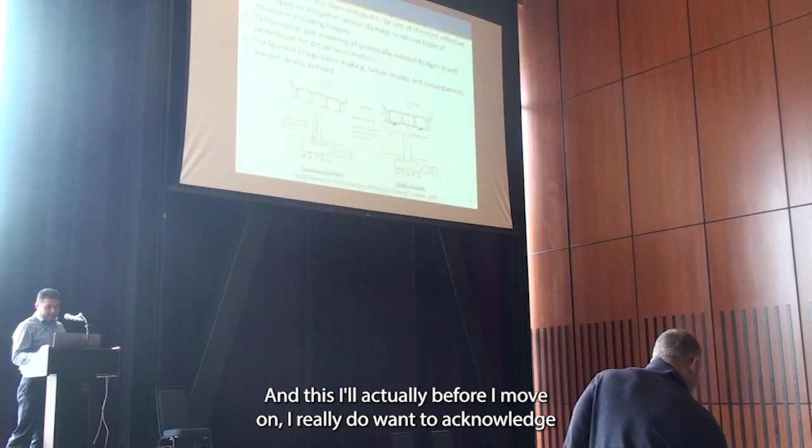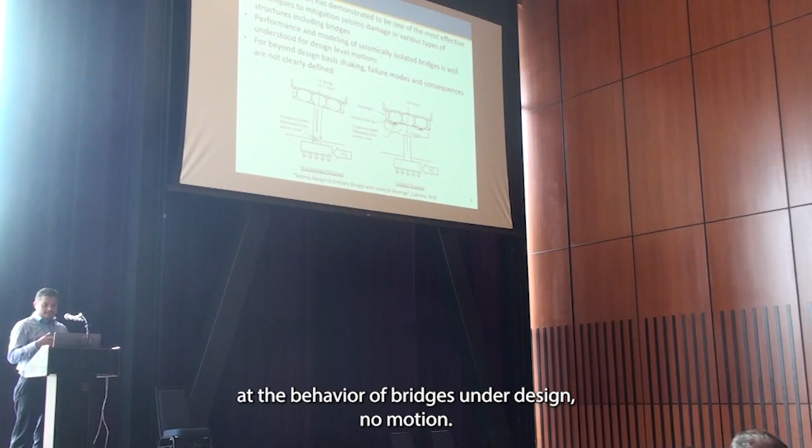We've been looking at the behavior of bridges under design level motion, and we know seismic isolation to be one of the most effective ways to protect structures from any type of damage. That has been well understood, but what about when we exceed the design capacity of the system?

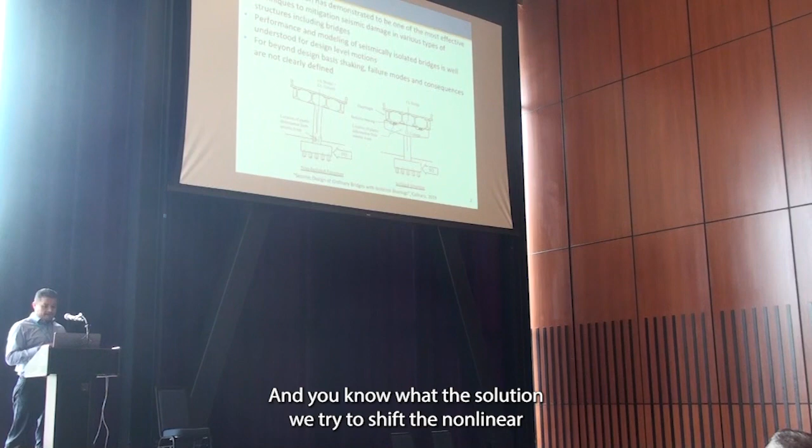How does damage progress? With isolation, we try to shift the nonlinear behavior to the isolators instead of plastic hinging in the columns. But at some point, as you keep loading the structure, what's going to happen to the structure?

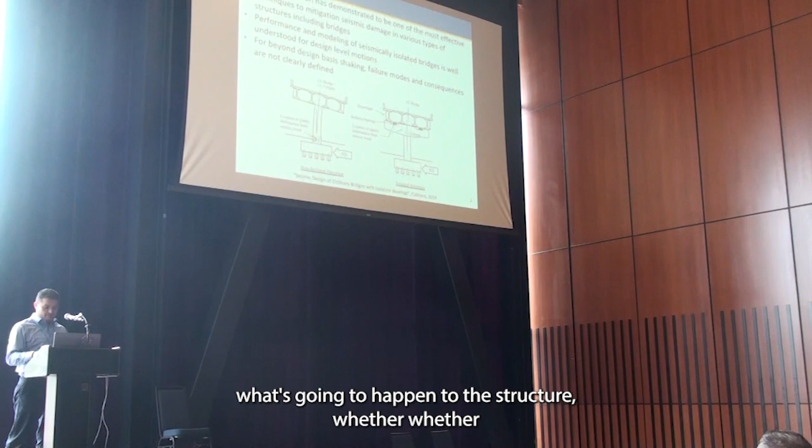As the limited studies looking at this have shown, you can look at failure of the bearings, as some testing has shown at Reno. Or there's been actually one test where they saw some yielding in the columns.

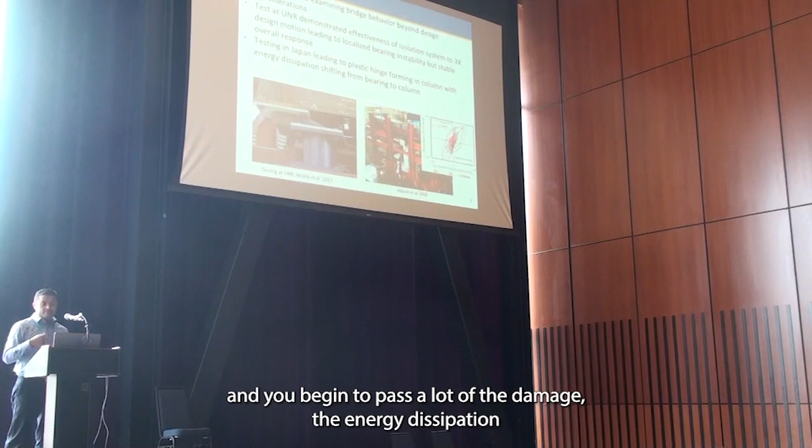That showed, as you expect based on seismic isolation theory, as you begin to yield your substructure, your periods change, the dynamics change, and you begin to pass a lot of the energy dissipation to the structural members instead of the isolators.

So we were interested in how this changes, and in terms of loading beyond design, whether there's anything we could do or considerations we should look at to improve the performance of bridges for beyond design considerations.

In this project, we're looking at developing the models, like looking at what are the limit states of bridges, and making sure we capture those types of behavior, including the bearings themselves.

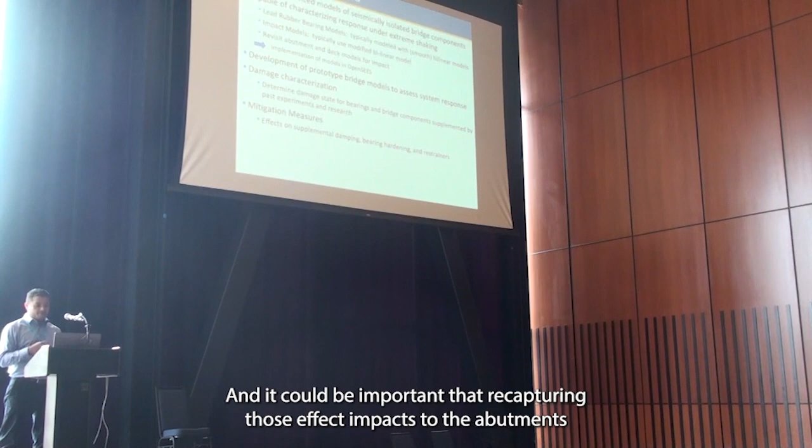We're looking at lead rubber bearings. Later on, we could look at friction pendulum bearings, but when you go beyond design and reach very high strain limits in the rubber, you have hardening and other behaviors that could be important, so we're capturing those effects, impact to the abutments, or shear keys, whatever may be in the way.

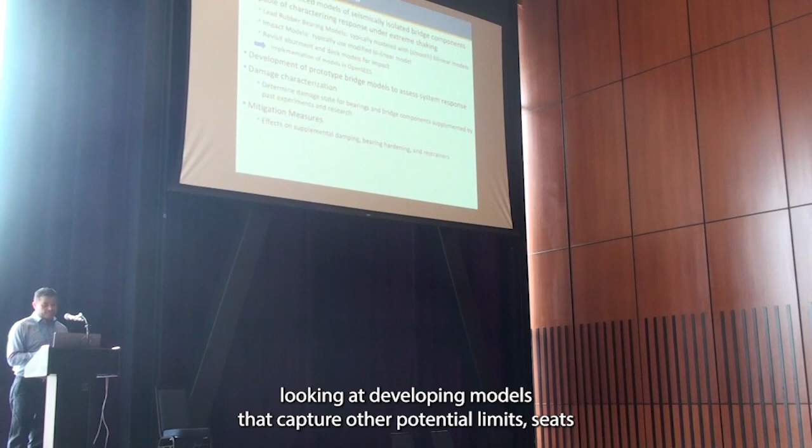So looking at developing models that capture the potential limit states in the bridge, and trying to develop prototype models of these in OpenSees, to then be able to characterize the type of damage that we could expect.

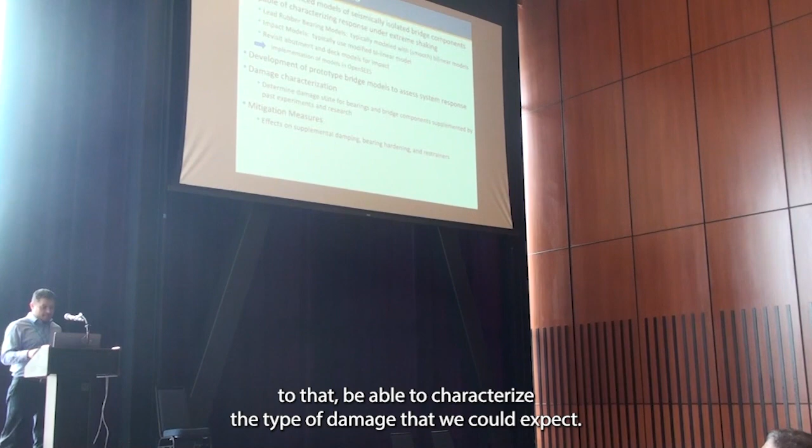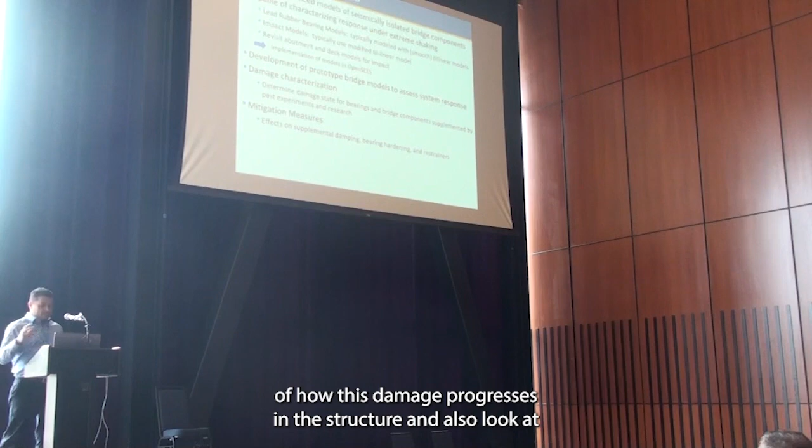So this is kind of the objective for now, really developing the models for this and trying to get an understanding of how this damage progresses in the structure, and also looking at how we can improve the design, whether by changing the isolator configuration, adding supplemental damping, or restrainers, and the effect those have on the performance of the bridge.

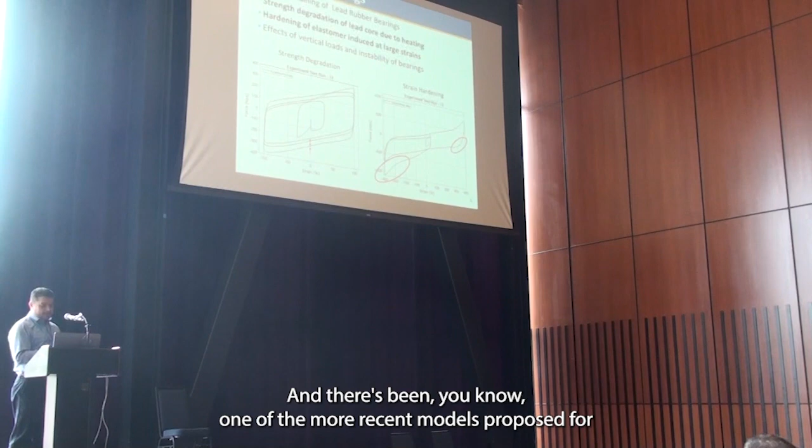So we've been working a lot within my research group on modeling of rubber bearings. One of the more recent models proposed for lead rubber bearings is Lead Rubber X, available in OpenSees, that captures degradation of strength with heating.

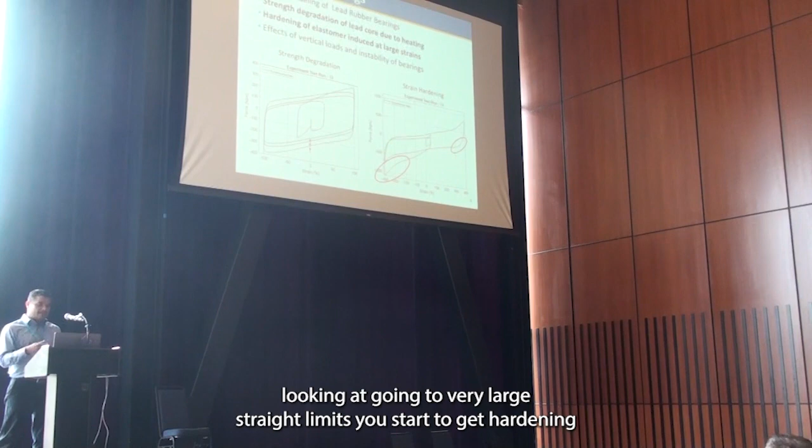But as we've done testing at even large scale bearings at SRMD, looking at going to very large strain limits, you start to get hardening. That's probably more reminiscent of high damping rubber bearings.

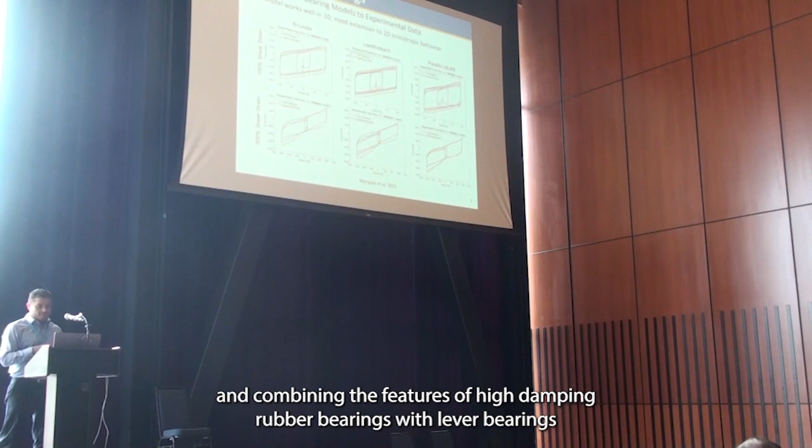So we've been looking at developing models combining the features of high damping rubber bearings with lead rubber bearings to be able to capture the behavior throughout a larger range of loading, leading to large strains, capturing those potential rubber hardening effects and so forth.

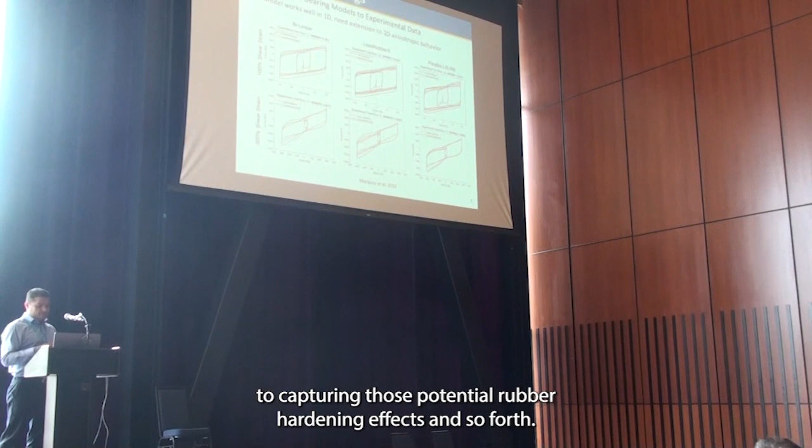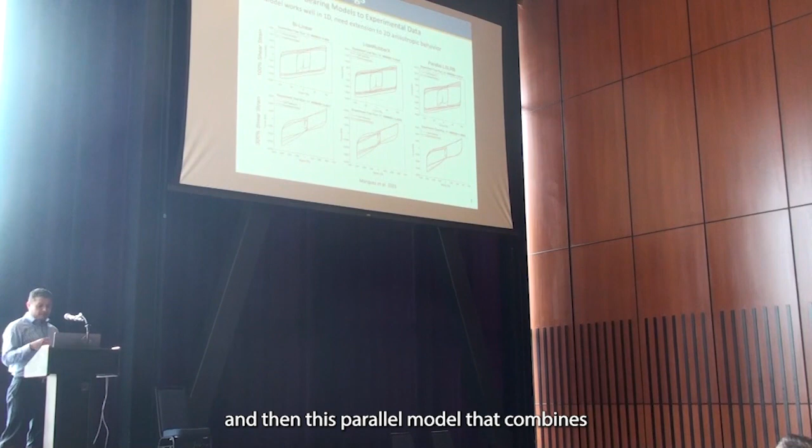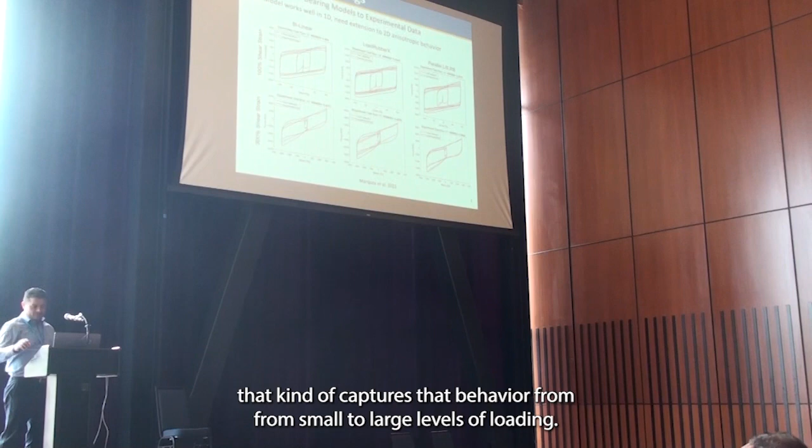So this is just a comparison of bilinear models, which are typically used in most analysis, one of the more recent models, Lead Rubber X, that shows the strength degradation, and then this parallel model that combines some of the features of high damping rubber to capture strain hardening and some of the more complicated behavior of rubber, to have a model that captures the behavior from small to large levels of loading.

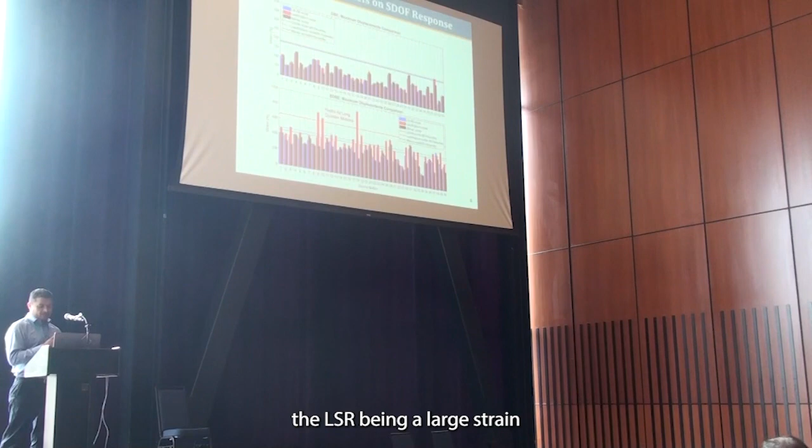So just to show you, these are simulations of a single degree of freedom system with these different models, the LSLRB, or large strain lead rubber bearing, Lead Rubber X, and bilinear, kind of showing a comparison.

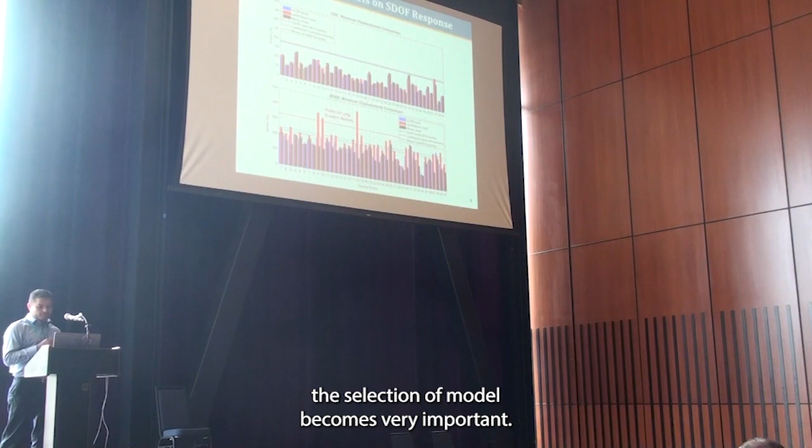If you look at a design level loading on the top, the model selection really doesn't matter, but as you go to very large levels of strain, the selection of the model becomes very important. One of the features, the red lines stick out on the bottom, that's the Lead Rubber X model with the heating.

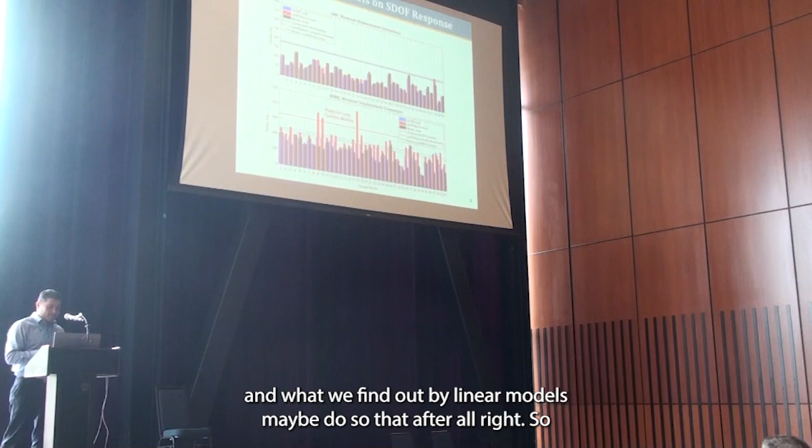But when you consider strain hardening effects, even in large strains, that kind of compensates. And well, we find out the bilinear model doesn't maybe do so bad after all, right?

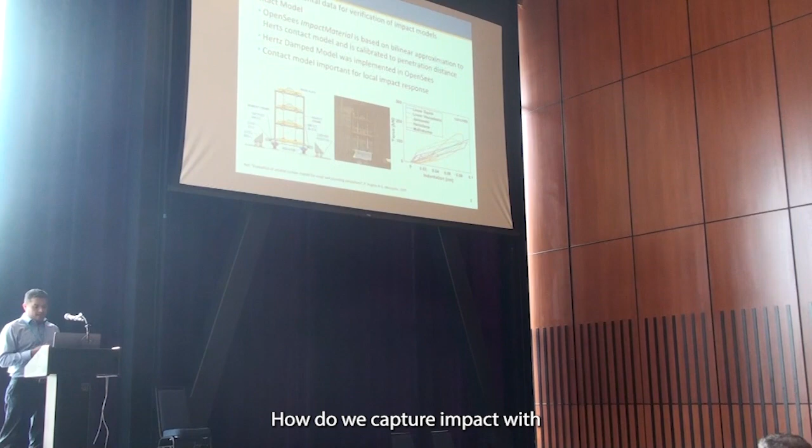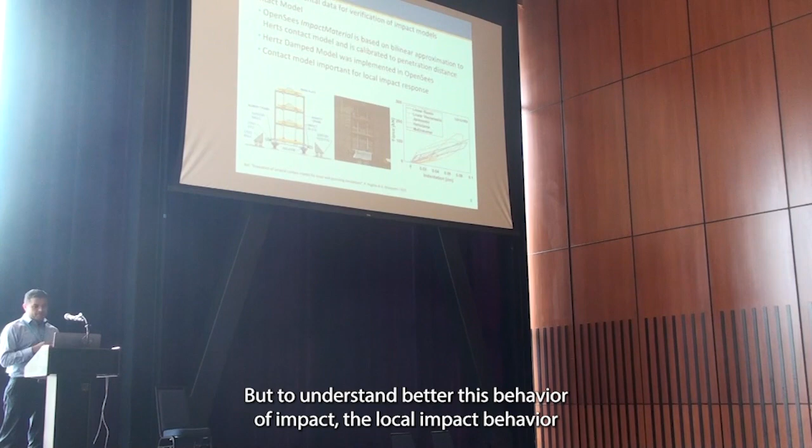So the other area we've been looking at modeling is impact. How do we capture impact with the abutments? There's been a lot of bridge work. In my research group, we started looking more at this for buildings in the past several years, trying to improve some of the models like the Kumar model shown. There's a bilinear model that was developed for bridges, but we're trying to understand better this local impact behavior and improve the models.

So we've implemented a Hertz-type model now in OpenSees to be able to better capture that behavior. This is based on some experimental data.

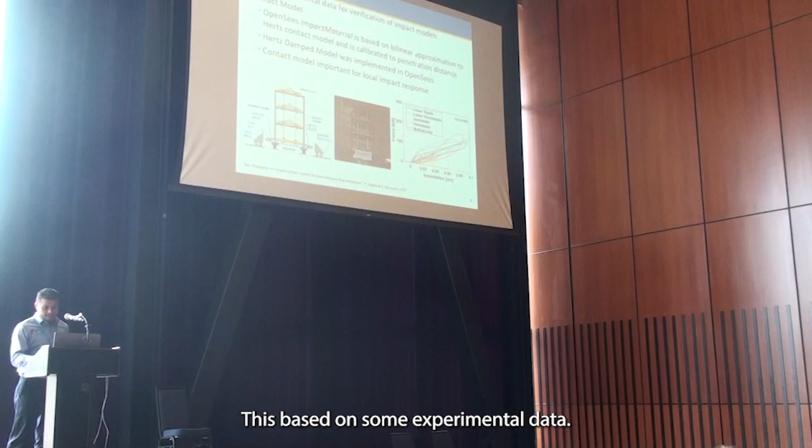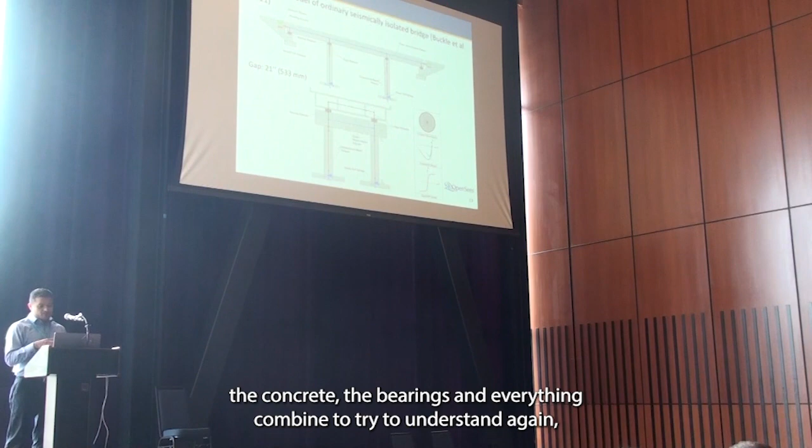Considering the more complicated bearing models capturing impact effects, we've been looking at developing, for ordinary bridges, a simple bridge model looking at the nonlinear behavior of the concrete, the bearings, and everything combined, to try to understand how these bridges behave for design and even beyond design.

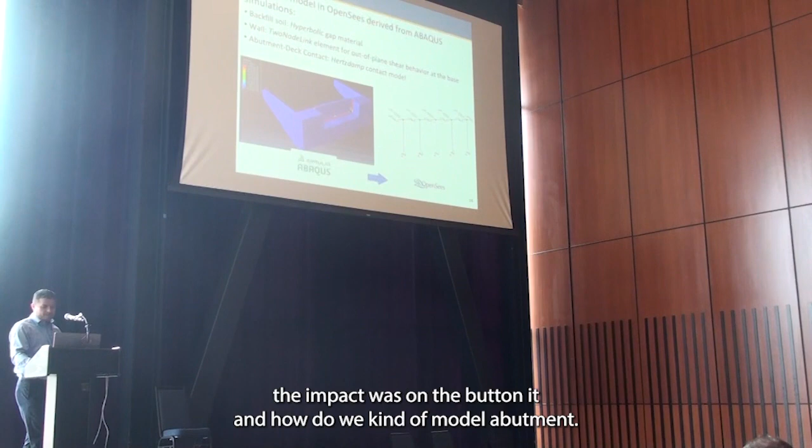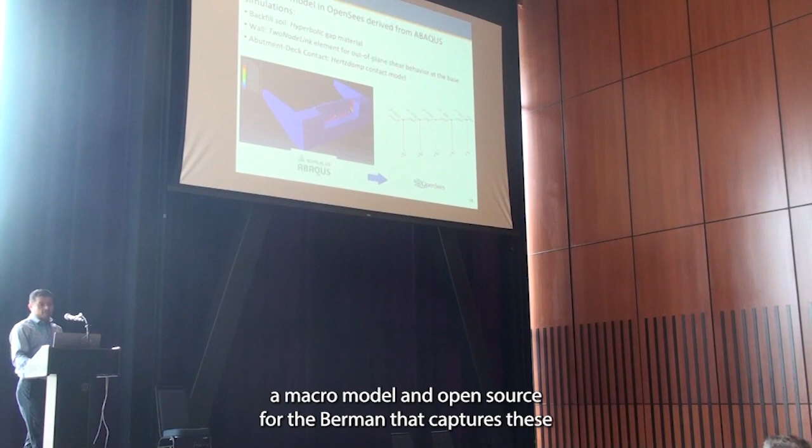One area we had to focus special attention on, going back to the impact, was the abutment and how we model it. We didn't find a whole lot of references on that. So we looked at developing models in Abaqus to try to calibrate a macro model in OpenSees for the abutment that captures these key characteristics of impact.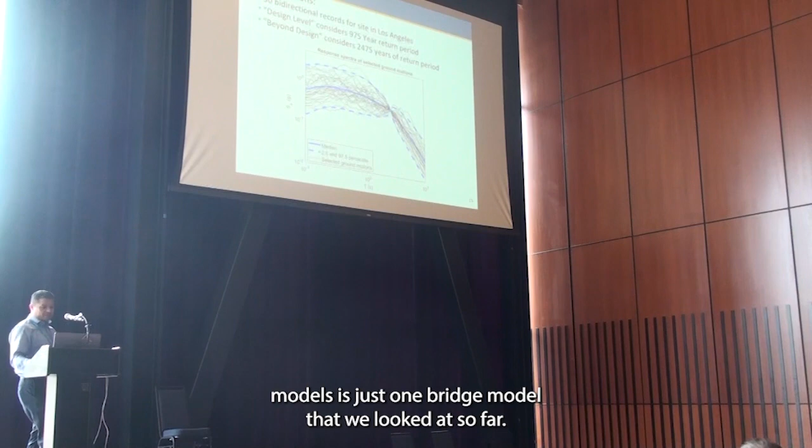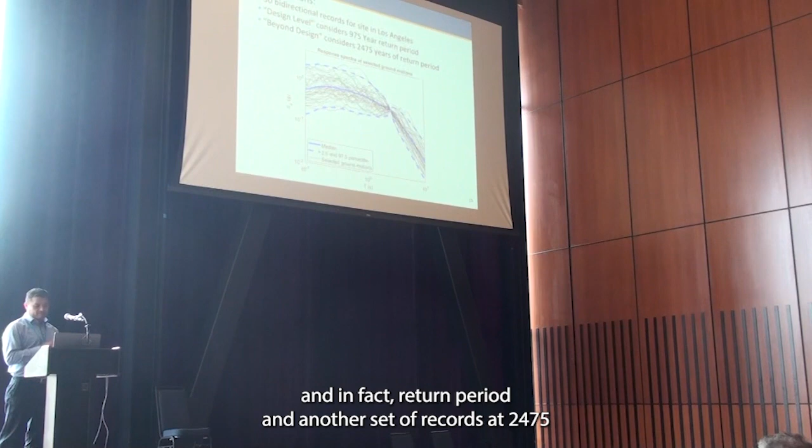So in developing the bridge model, this is just one bridge model we looked at so far. We developed a set of ground motions, just 30 motions: one set for the design level, what we consider the 975-year return period, and another set of records at 2475 years referred to as beyond-design motions.

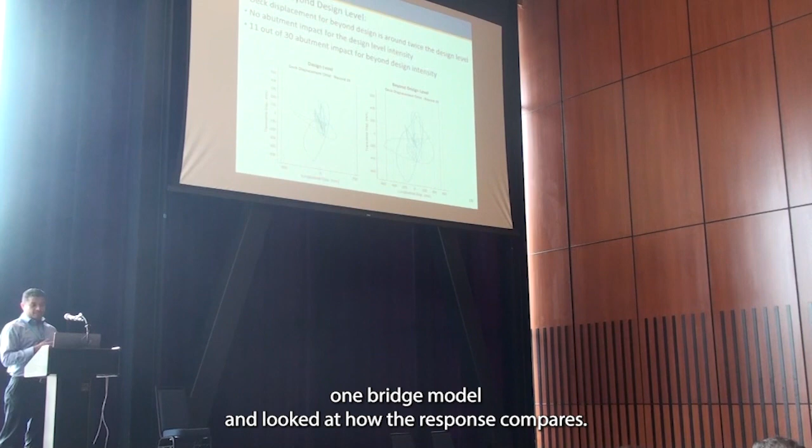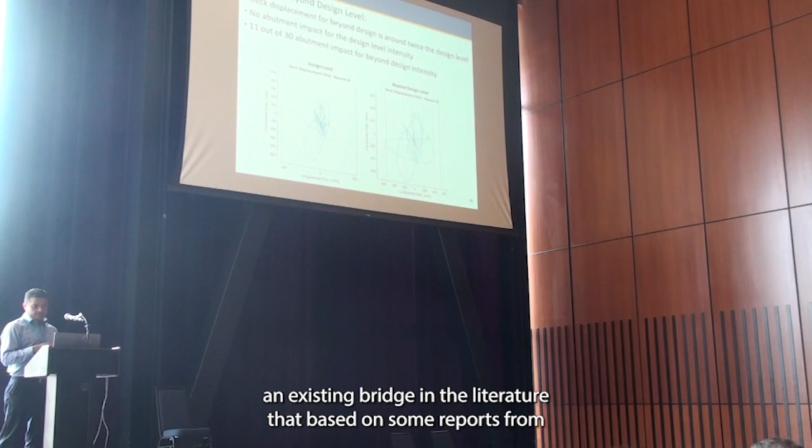For these sets of motions, we looked at just that one bridge model and how the response compares. We took an existing bridge from the literature, based on some reports from Professor Buckle at Reno, that was isolated. I think the isolation was modeled by Constantinou at Buffalo. So we took this existing bridge to look at how current bridges designed to current standards would perform.

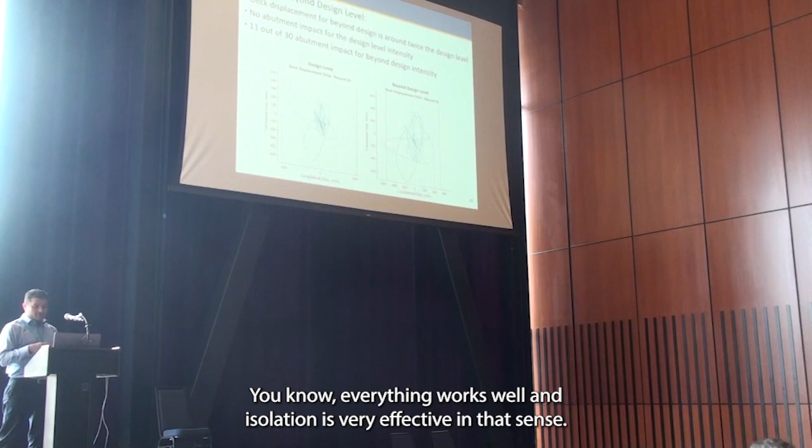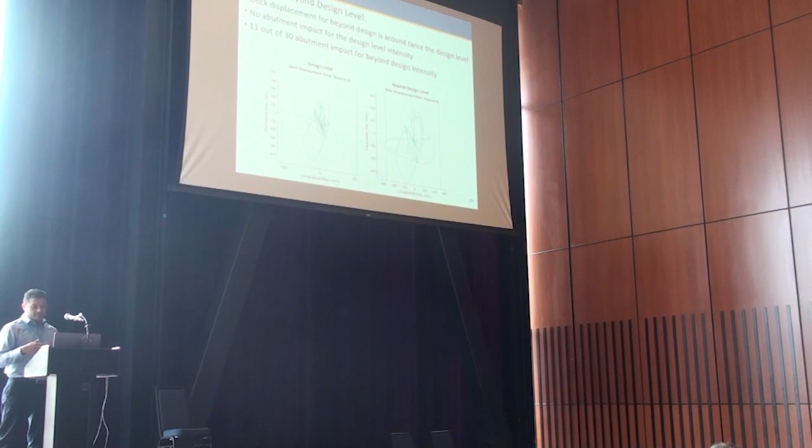For design level loading, again, is what we would expect: everything works well, the isolation is very effective in that sense. But when you look at beyond-design motions, you do start seeing the displacement exceeding the capacity, or the specified design gaps for the abutments.

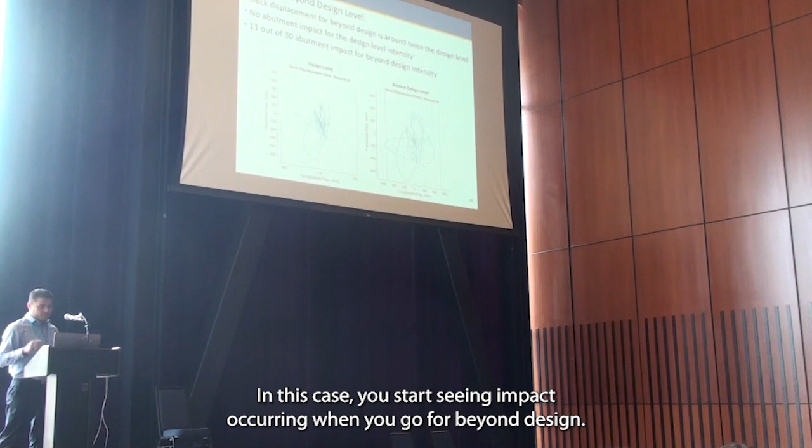The dashed lines are the location of the abutments. In this case, you start seeing impact occurring when you go beyond design. For that set of motions, about 11 of the 30 motions had some impact occurring.

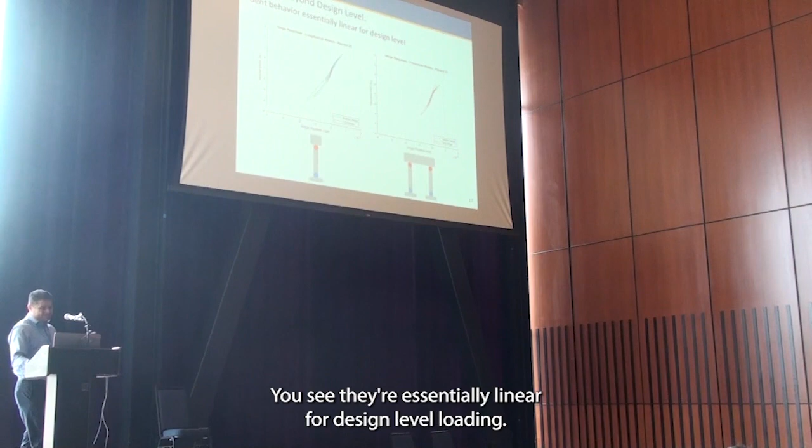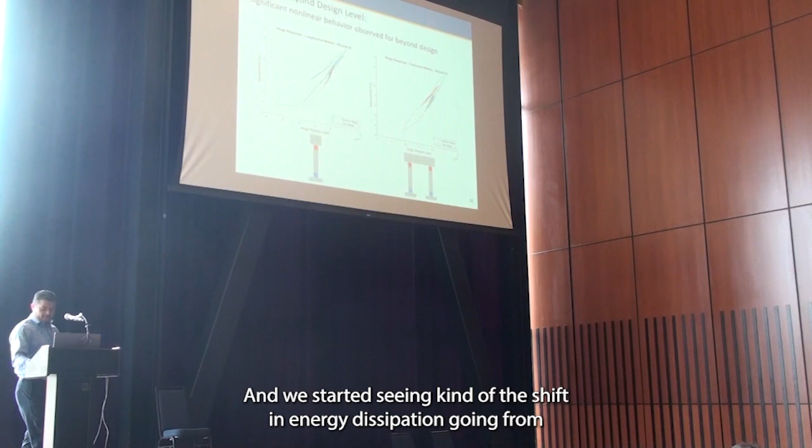In terms of the response of the bents themselves, they're essentially linear for design-level loading. But when we went to beyond-design loading, for one of the motions we selected with roughly an average response, you start seeing the development of plastic hinges within the bents, and a shift in energy dissipation going from the isolators to the hinges.

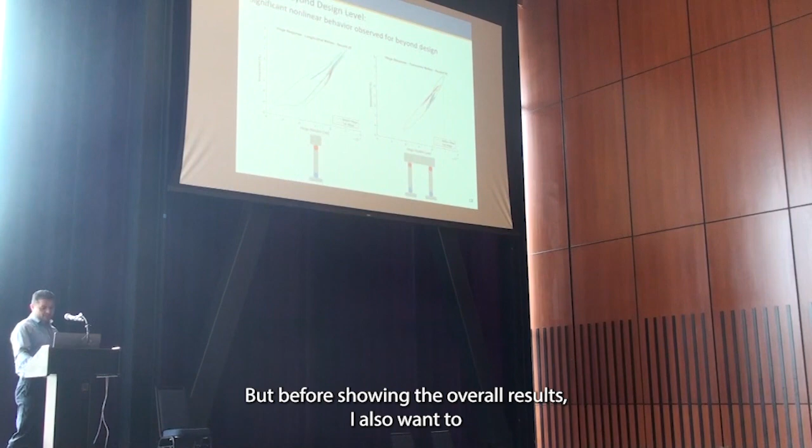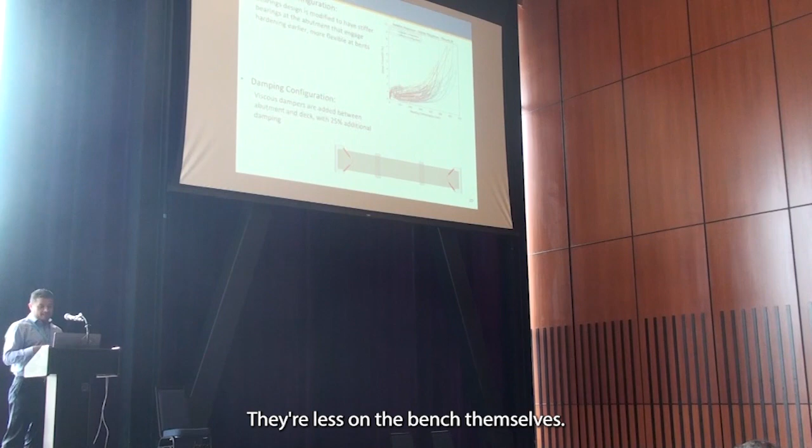I'll talk a bit more about that after. But before showing the overall results, I also want to talk about some other slight modifications we made to the bridge: shifting the configuration of the isolators, putting stiffer isolators at the abutments to attract larger forces there and less on the bents themselves, and also adding viscous dampers.

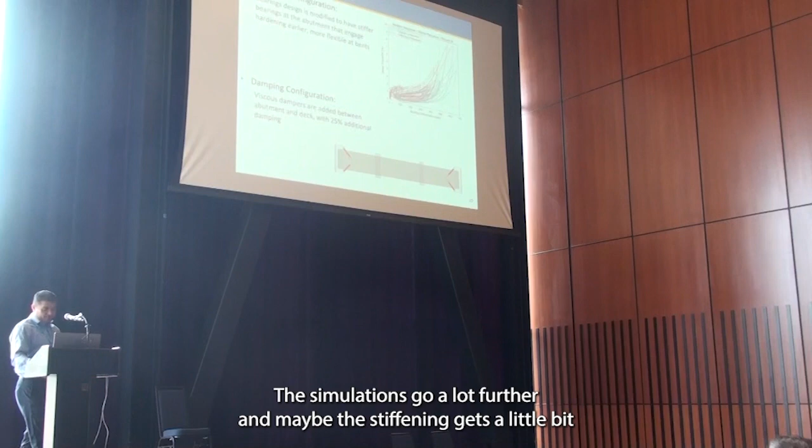What happened when we added the stiffer bearings at the abutments is we attracted larger forces, with stiffening. The lead rubber bearing model we're using has stiffening behavior that was calibrated up to a certain level, but the simulations go a lot further, so the stiffening may get a bit exaggerated at that level. That's something we have to work out in the model later.

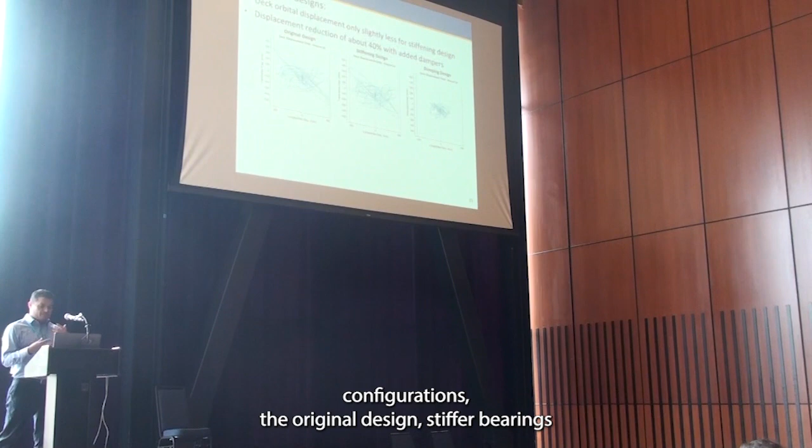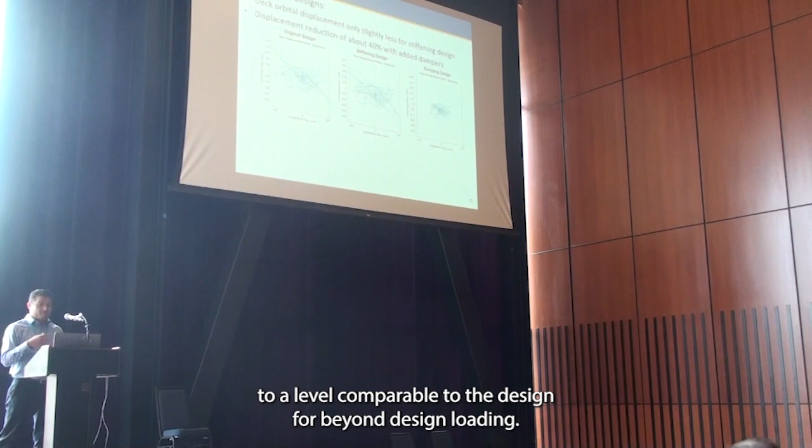Despite that, when we look at the different configurations—the original design, stiffer bearings at the abutments, and added damping—we found damping is really effective at reducing the displacements, getting them down to a level comparable to the design case even for beyond-design loading. The stiffening gives similar displacements but with a minor reduction overall, leading to fewer impacts across the set of ground motions.

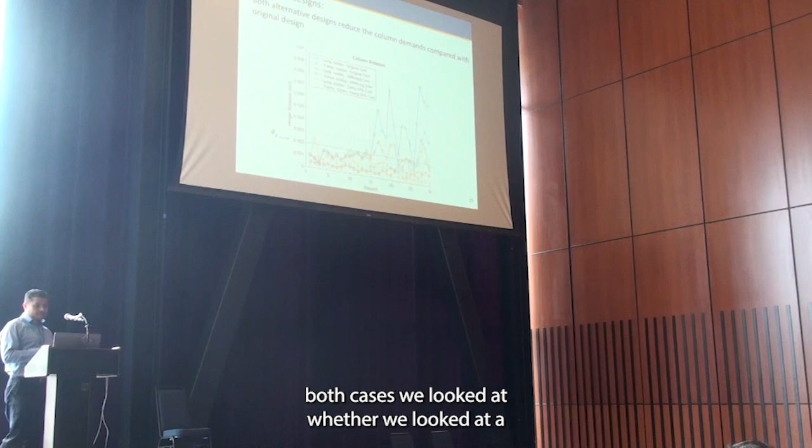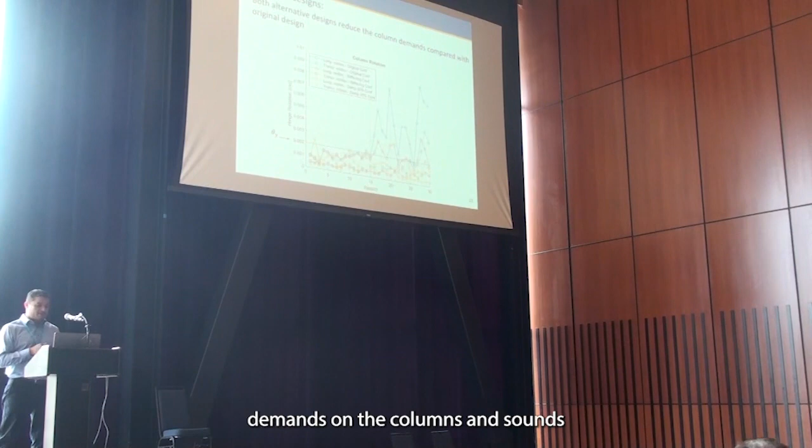But in both cases, where shifting the bearings around seemed to matter was in terms of the hinge rotation demands on the columns themselves. In blue, this is the longitudinal direction, and you get some very high levels of hinge rotation—still not critical to the point of near collapse, but significant hinging.

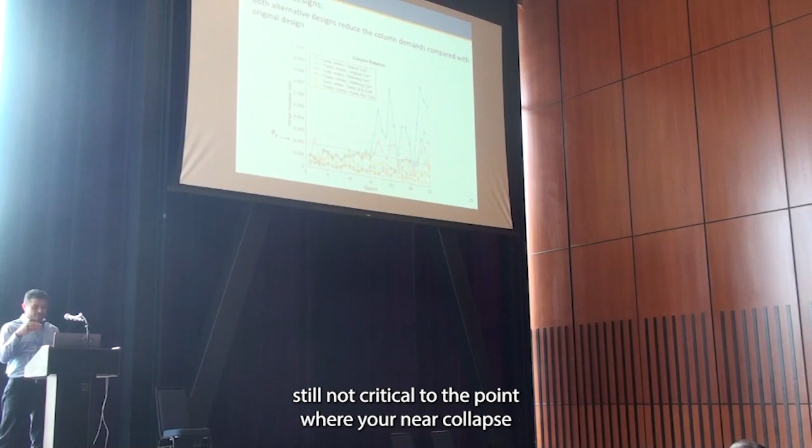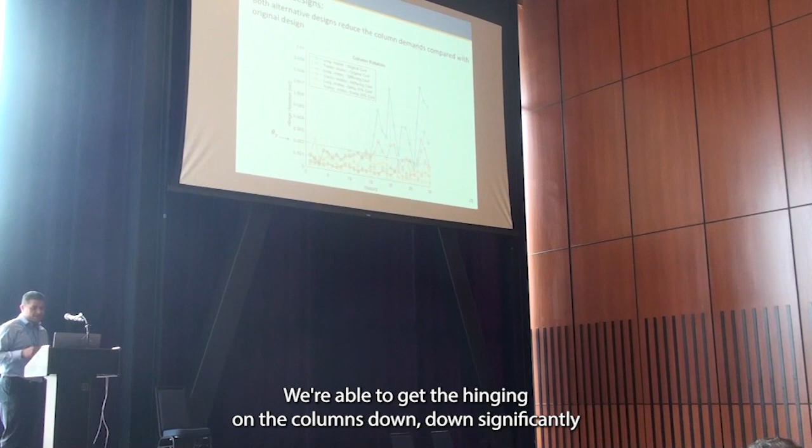By making these two modifications to the design, we're able to significantly reduce the hinging on the columns, both in the longitudinal and in the transverse direction.

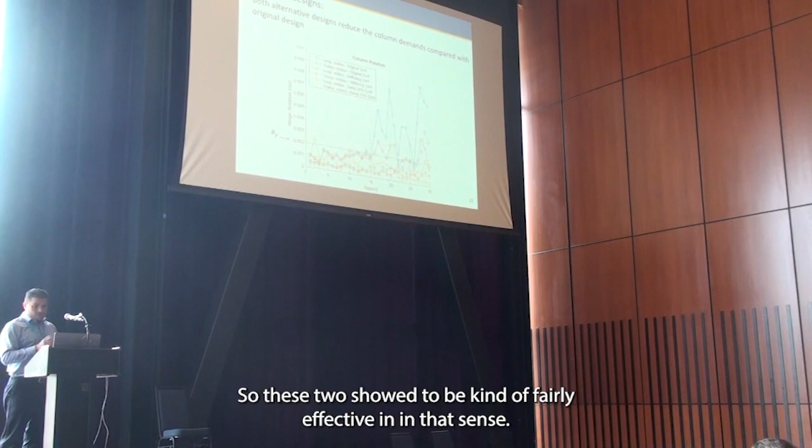So these two show to be fairly effective in that sense, and these are kind of the key results I wanted to focus on, to summarize our results. One of the things we're primarily interested in understanding here is, as you begin to develop hinges in your structure, how does that mechanism change in terms of transferring energy dissipation from the isolators to the concrete hinges themselves?

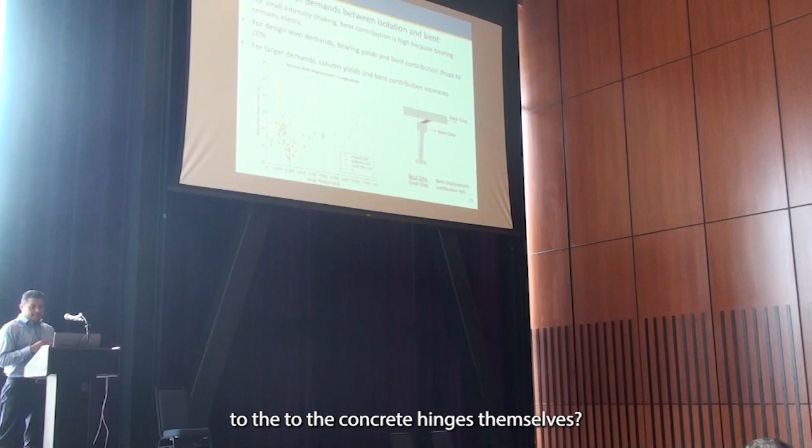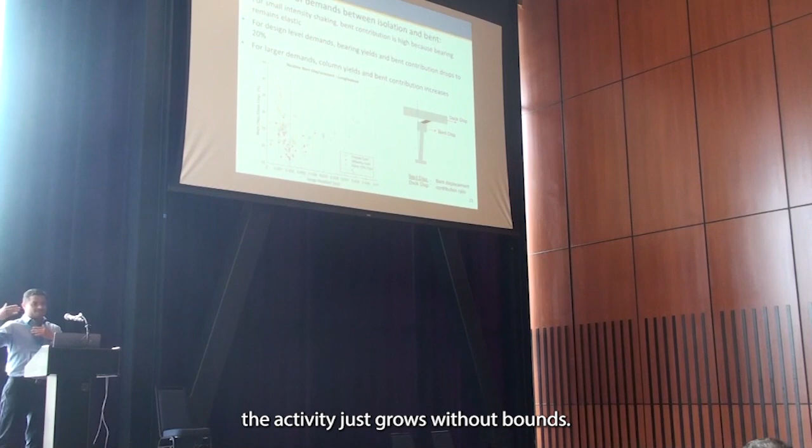This is very important because in buildings this has been looked at in a lot more detail. Once you begin to yield an isolated building, the ductility just grows without bounds - it's very hard to control ductility once you yield in an isolated building. Bridges are a different mechanism. The theory has always been that you're going to get the same type of behavior, and you are seeing this effect, but it doesn't seem to be as significant as it is for building structures that are isolated.

This plot shows the contribution, or the ratio of bent displacement to the total deck displacement, showing how much the bent is taking versus the contribution from the isolators themselves. For very low levels of shaking, the isolator could take time to engage, and most of the contribution doesn't really matter for small levels of shaking. You could have large contributions from the bent itself, and that's okay.

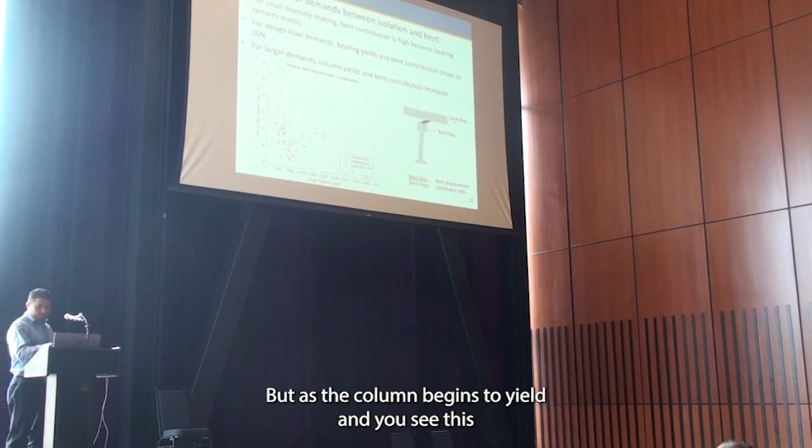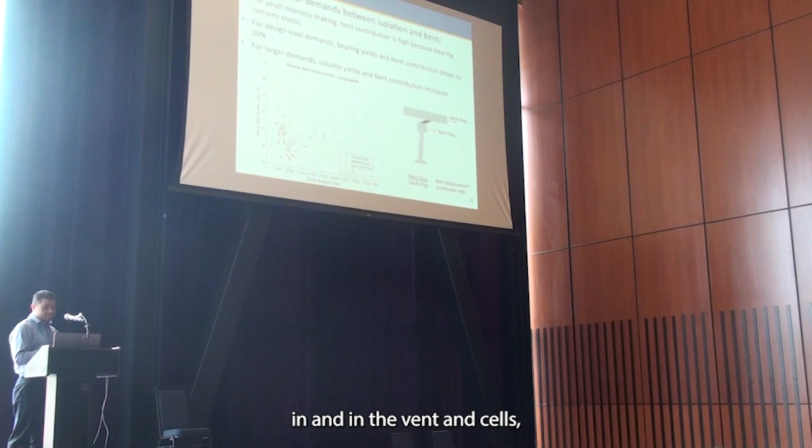But as you go to design level loading, you start seeing a lot higher demand, and more demand gets transferred to the isolator, as it should be. But as the column begins to yield - shown in the dotted line there - where your hinges begin to yield in the bent themselves, you start seeing an increase in this configuration, especially looking at the original configuration, an increase in the amount of bent displacement compared to the isolator.

So you start seeing the shifting in mechanism of the hinging. But again, it's still in a controlled manner, I would say, unlike buildings where we're seeing that this just kind of seems to take off.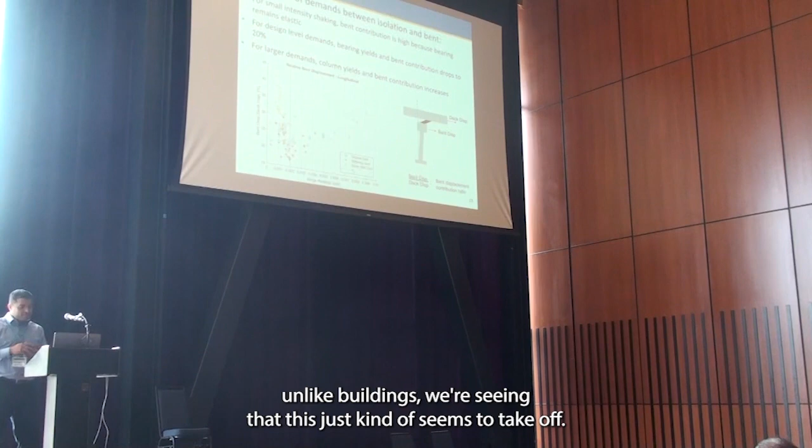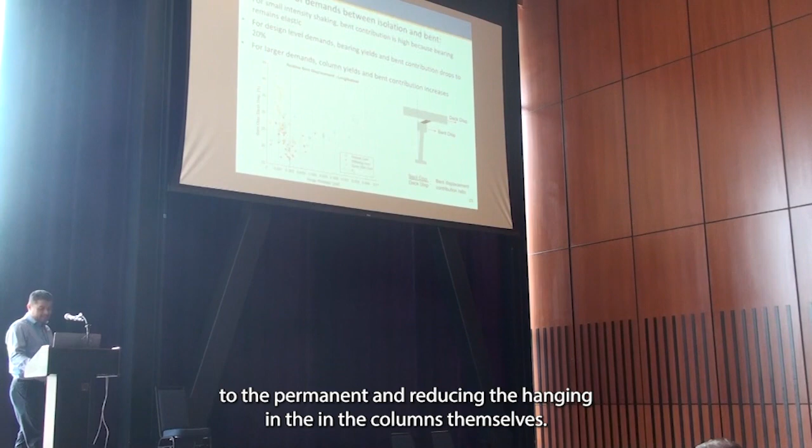But nonetheless, when you look at the cases with damping, you're getting a lot more contribution from the bent, but it really doesn't matter because the displacements are overall fairly small - you're not yielding. And then with adding stiffer isolators at the abutments, you're also transferring a lot of the load to the abutment and reducing the hinging in the columns themselves.

So for the overall conclusion from the study: at design level shaking, isolation performs as expected - this is no surprise, it's been looked at quite a bit in the past. But beyond design shaking, you're seeing the development of plastic hinges. Again, we just looked at one prototype bridge here and one set of ground motions, and there's certainly a lot more to do in that area.

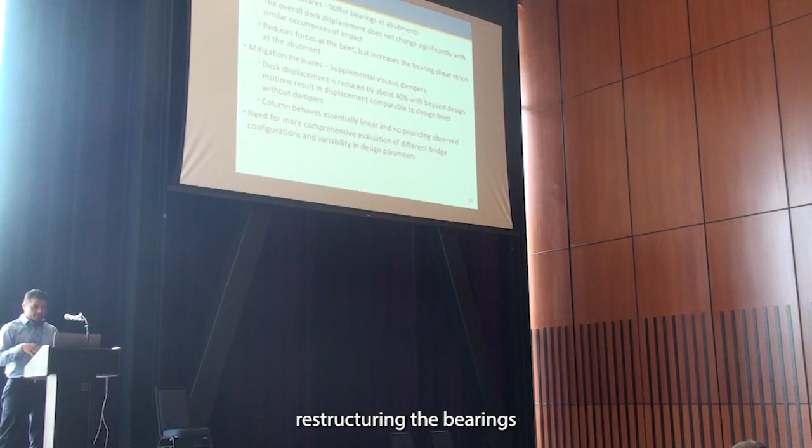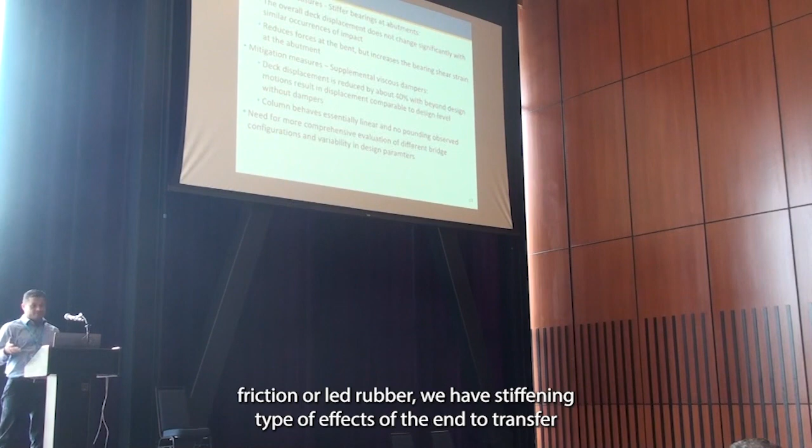This way of maybe restructuring the bearings and how we place them in the isolator, attracting more forces to the abutments, may be one way of protecting the bents a little further, and even having isolators where you could control whether it's friction or lead rubber, where you can have stiffening type effects in the end to transfer more of the forces towards the abutments and protect the bents in this case.

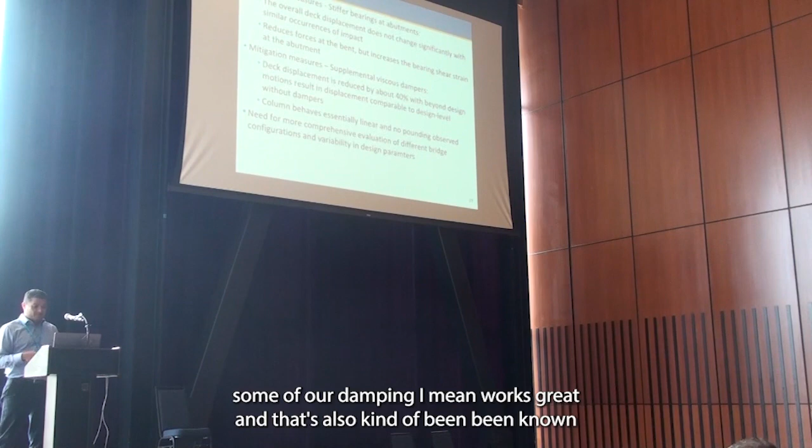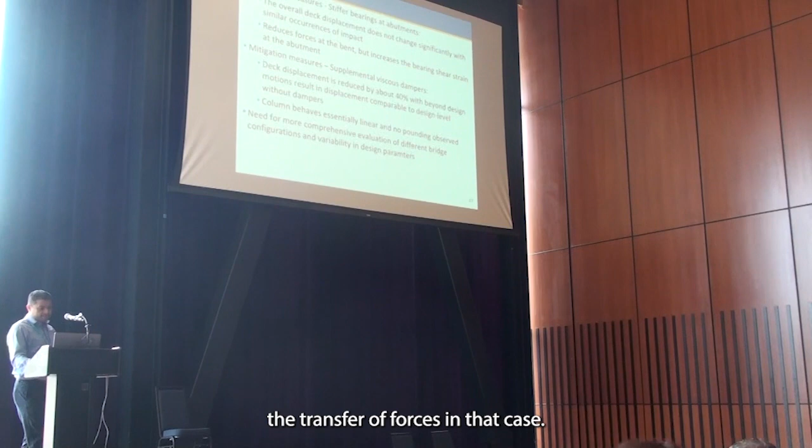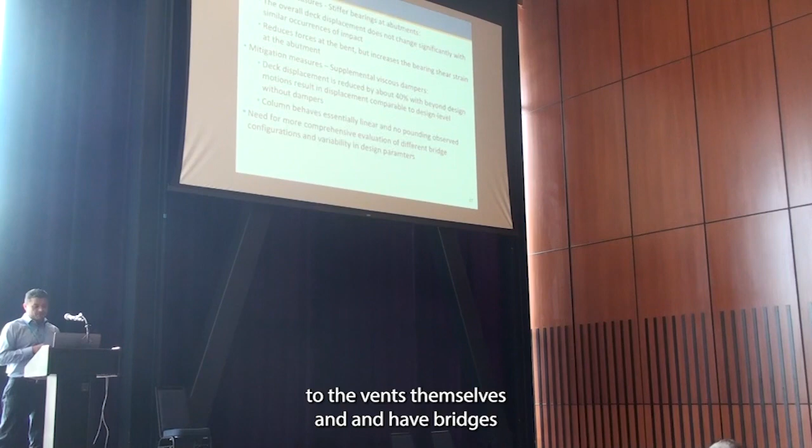Supplemental damping works great, and that's also kind of been known. What we have looked at in detail is how to manage the transfer of forces in that case. But overall, we need to look at this in a lot more detail in terms of different bridge configurations to really understand. One of the things we're interested in exploring further here is, as you have the isolators on bents with different ratios of stiffness and strength, how you could better control that transfer of damage to the bents themselves, and have bridges that could survive these beyond design basis events and keep functional.

So this is, in the limited time I have, all I could present for now. Sorry if I went quick or didn't get into a lot of details on some aspects.